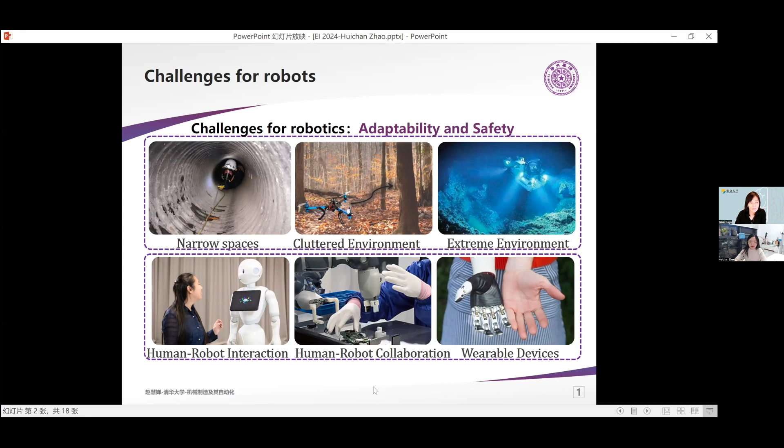So basically, I think embodied intelligence is a great way to solve the above two challenges. However, in this conference, there are mainly two types of intelligence: the first is mechanical intelligence, and the other is more like Yuki's work, computational intelligence. For my research in the past many years, I've been focusing on the mechanical intelligence of robots.

Sorry, this one is kind of hiding my slides. Okay.

For this mechanical intelligence, there are many advantages. For example, they are very simple—you simply change the compositional material of your robot into some material with inherent compliance, and then you get this kind of mechanical intelligence. For example, a soft gripper can adapt to the shape of an object autonomously without any sensors and controllers in the system. Another advantage is that it is very reliable, so we don't need a computer to compute everything for us, and the system will automatically show its intelligence. The other two important advantages are low cost and low energy consumption.

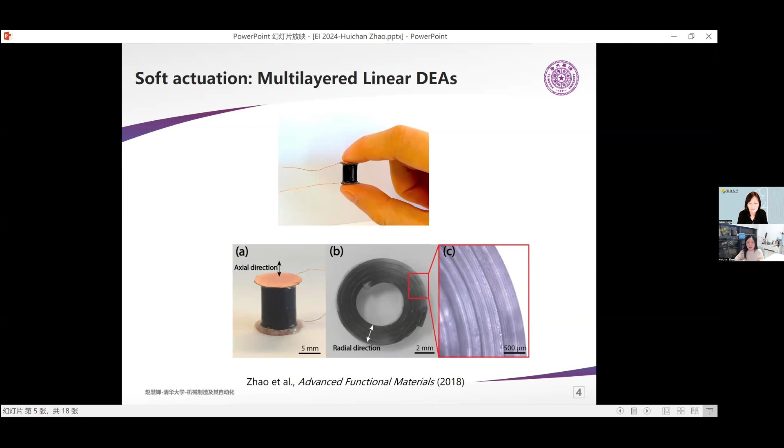Here I will share a couple more close examples. The first is a material we have built called artificial muscles, based on dielectric elastomer actuators. Electrostatic force generates a deformation in the material. This material has a very special characteristic: it can self-heal itself, meaning even if it experiences a large strain or some cutting or damage during operation, it can heal itself and keep functioning.

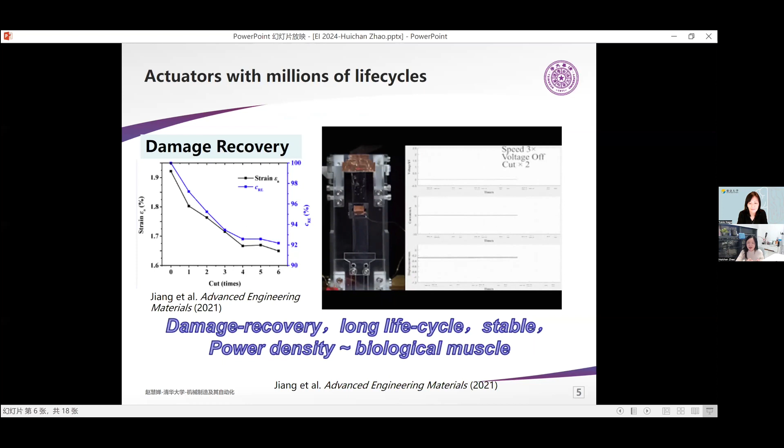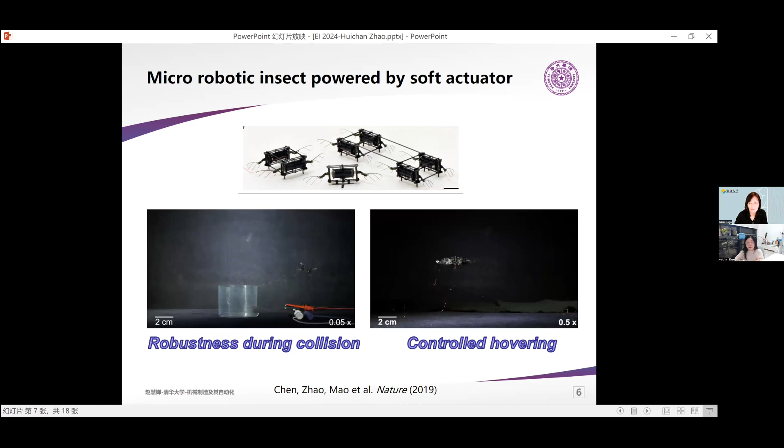So when we apply such materials to build an insect-sized robot, this robot is very robust. For example, during flight, if it accidentally drops onto the ground or flies into a wall, because the material is very robust and can self-heal, the robot is also very robust. So this is one example.

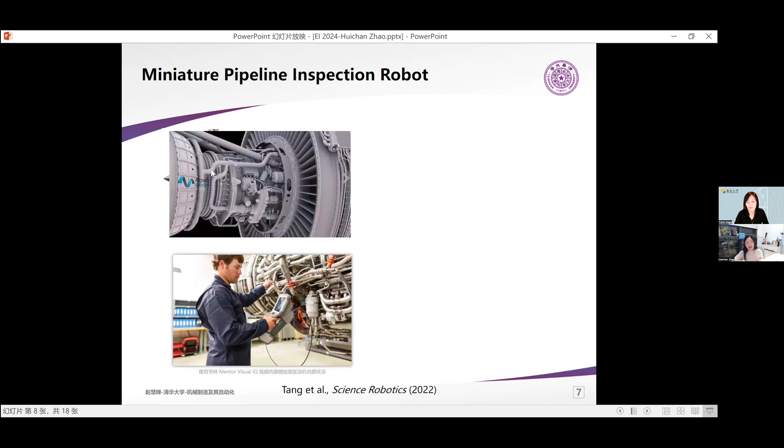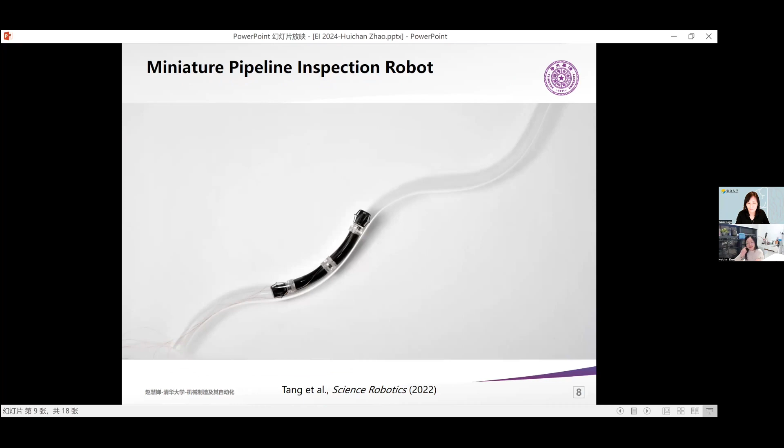Recently, we also built a robot to get into tiny pipes for inspection. The robot looks like this, and we built a prototype. It can fit into diameters of less than 1 centimeter. We don't have any very complex mechanism for it to adapt to the complex shapes of the pipes. Simply by utilizing its soft body, it can go into complex shapes like an L shape, S shape, and a spiral shape without any mechanism or control. So this is another example.

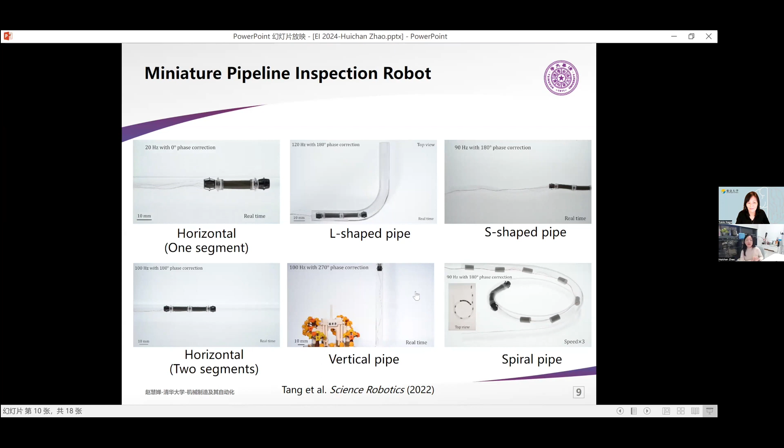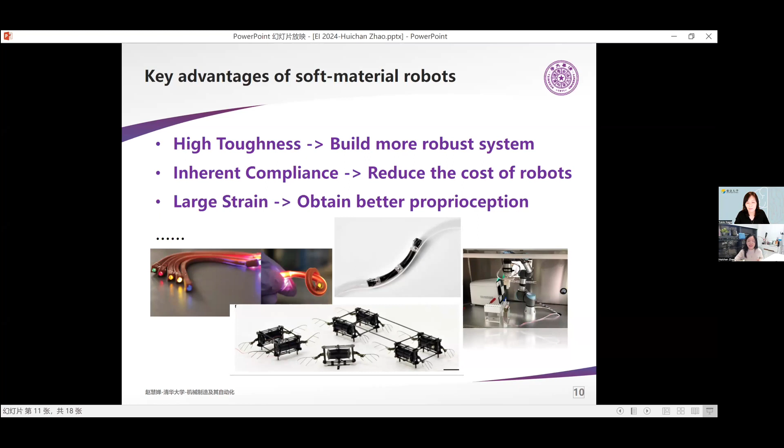Soft materials can facilitate a robotic system with good toughness and good compliance. Some other advantages: soft materials can by itself amplify the force-induced deformation so that the sensing can also have better sensitivity. But later we found that soft materials are not always as adaptable as we expect them to be.

So how we solve this problem: we get some inspiration from humans and embed this soft finger with a rigid skeleton. We use a camera to catch the shape of the object and let this finger decide what kind of shape it should take, and then use this strategy to grasp the object. In this way, it can adapt to the shape much better than a totally soft and totally passive way.

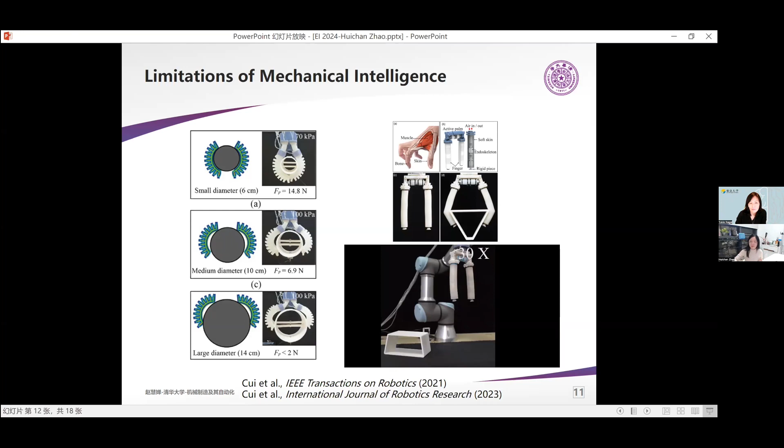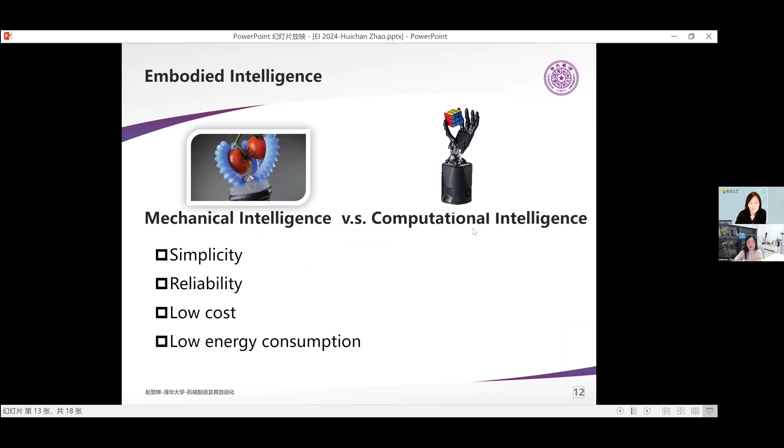This makes me think that perhaps in the future we should also look at computational intelligence for soft robots to further increase their adaptability and safety. But the challenge is different from a typical robot.

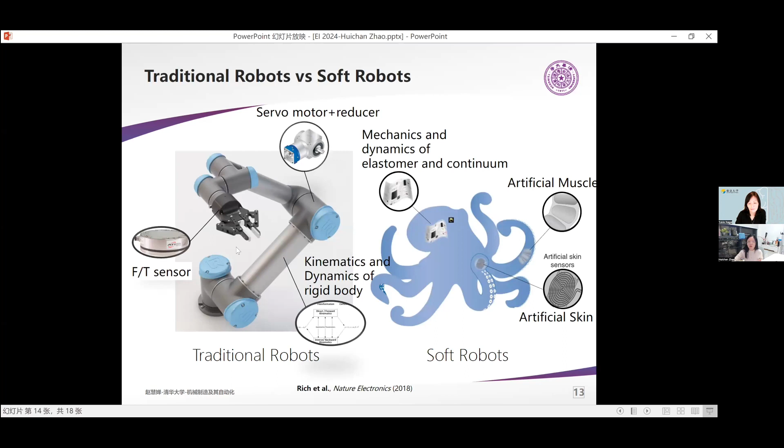For a soft robot to achieve this kind of computational intelligence, we also need to find the correct sensors, the powerful sensors, and the powerful actuators for it, compared with a traditional robot, because we don't have that off the shelf. So in that way, we have to build different kinds of soft sensors to facilitate a robot with powerful perception capability to achieve this perception, plan, and decision cycle.

This is some work we've recently been doing, like building a small soft sensor that can sense different forces from different directions. In this way, we can put many of them on the skin of a soft robot to facilitate good perception capabilities. But this example is showing it put on a rigid robot.

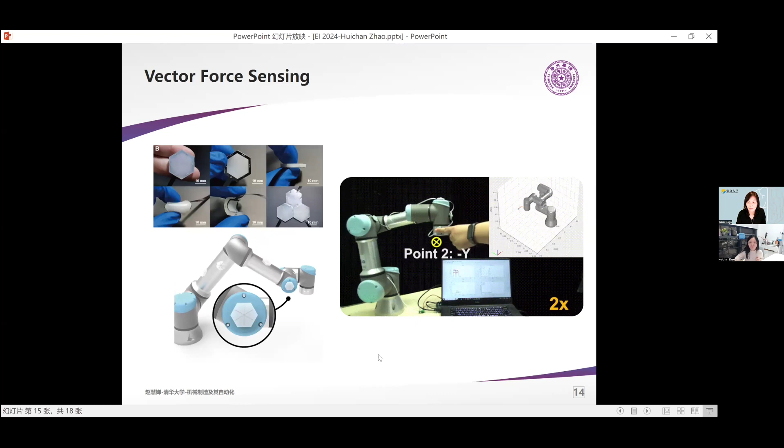Another important thing is that soft robots experience very complex geometry during their deformation. So in that way, we have to reconstruct this very complex 3D shape in real time. In this work, we have been embedding IMUs and also fiber Bragg grating sensors into a soft body to try to reconstruct the shape in real time.

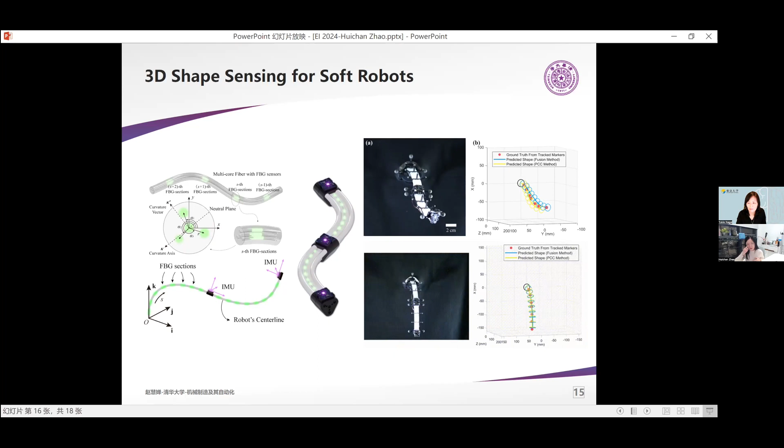So these are some basic functions to achieve the future of computational intelligence. I hope that in the future we can combine mechanical intelligence and computational intelligence to take advantage of both and build a more adaptive and safe robot.